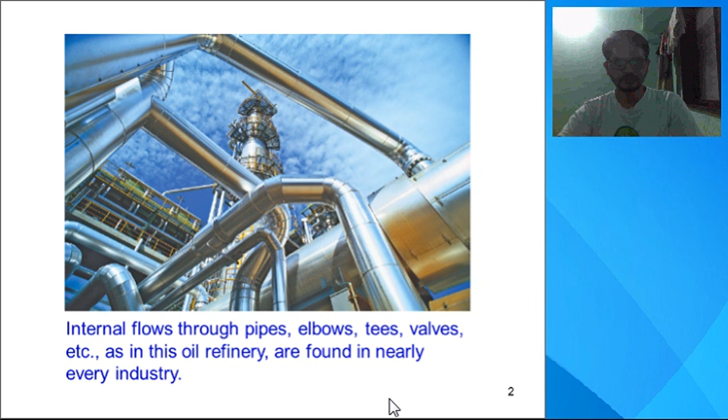So liquid or gas flow through pipes or ducts is commonly used in heating and cooling applications, and also for fluid distribution networks. The fluid in such applications is usually forced to flow by a fan or a pump through a flow section.

We pay particular attention to the friction, which is directly related to the pressure drop that might take place, and head loss during the flow through the pipes and the ducts.

The pressure drop is then used to determine the pumping power requirement - how much should be the power of a pump installed in a pipeline, or the power of maybe a fan, or it could be a blower.

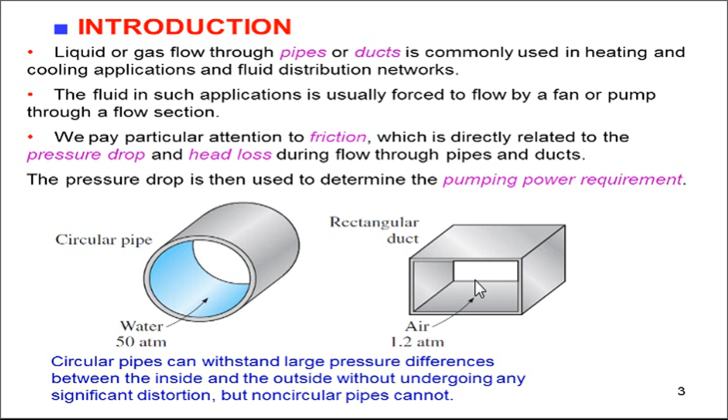Now, energy losses through the pipe take place when the flowing fluid experiences many resistances, which result in the loss of energy of the fluid. These energy losses can be classified into two types: major losses of energy and minor losses of energy.

Major losses are due to the friction, and it can be calculated using two formulae. One is Darcy-Weisbach equation and the second one is Chezy's formula.

Minor losses are the losses which occur due to presence of different pipe fittings - for example, sudden expansion, sudden contraction, provision of a bend or elbow or valves, and so on.

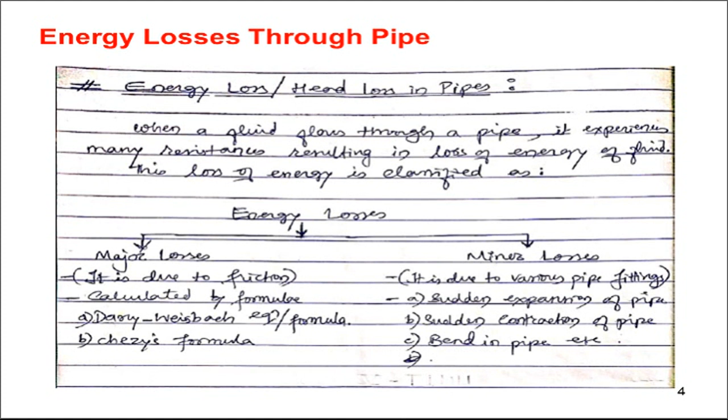So coming to the point of major energy losses, these are measured, these can be calculated using Darcy-Weisbach equation.

Consider a uniform horizontal pipe with a steady flow of a fluid, and consider a mass of fluid between two sections, section 1-1 and section 2-2. The flow of fluid is a steady flow, meaning the velocity is not changing with respect to time. Also, the cross-sectional area of the pipe is uniform, so the diameter of the pipe is uniform.

Let us consider two sections 1-1 and 2-2, and analyze the fluid present in these two sections. Let P1, P2 represent intensity of pressure at sections 1 and 2. Let v1, v2 represent the velocities at sections 1 and 2.

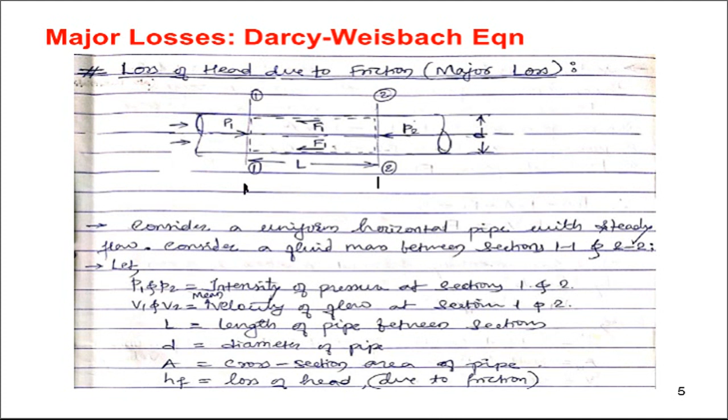Now let us apply Bernoulli's equation between sections 1 and 2. So we write: total energy head at section 1 is equal to total head at section 2 plus loss of head due to friction, if any, between 1 and 2.

So the different terms are: the pressure head P1 upon gamma plus kinetic head V1 square upon 2g plus datum head Z1 at section 1 is equal to pressure head P2 upon gamma plus V2 square by 2g kinetic head plus Z2 as datum head at section 2, plus the loss of head due to friction, that is HF.

But for a given horizontal pipe, Z1 is equal to Z2, so this can be cancelled, and velocity V1 is equal to V2, since the diameter of pipe is same, it is uniform, and it is a steady flow, so automatically it becomes a case of uniform flow. So V1 is equal to V2, and these two terms get cancelled.

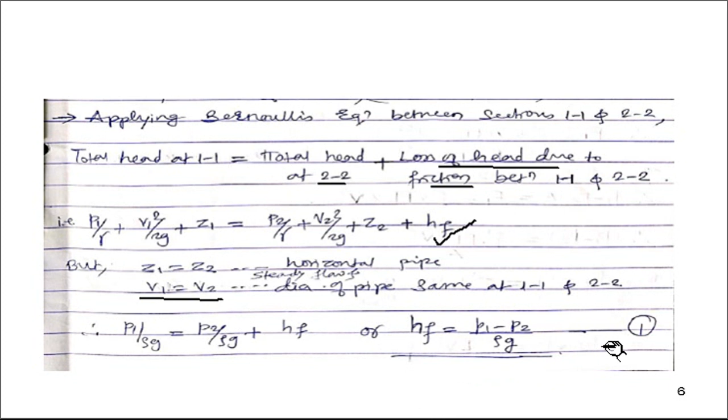So therefore we have P1 upon gamma, that is rho g, is equal to P2 by gamma rho g plus HF. Or you can write the frictional head loss HF equal to P1 minus P2 upon rho g. Let us call this equation number 1.

Now as the velocity of flow is constant at both sections 1 and 2, it means there is no acceleration of the fluid. There is no acceleration of the fluid, so acceleration is 0.

Thus the sum of forces in the flow direction acting on the fluid mass between the two sections is 0. This is as per Newton's second law of motion, that is summation of F is equal to mass into acceleration, and acceleration is 0, so automatically summation of F is equal to 0.

So all the forces acting on fluid mass are written as: there will be a pressure force at section 1, calculated as P1, intensity of pressure, into area. This is towards right in the direction of flow, so positive.

Then we have pressure force at section 2, written as P2 into corresponding area A, cross-sectional area. This will be against the flow direction, towards left, so negative sign.

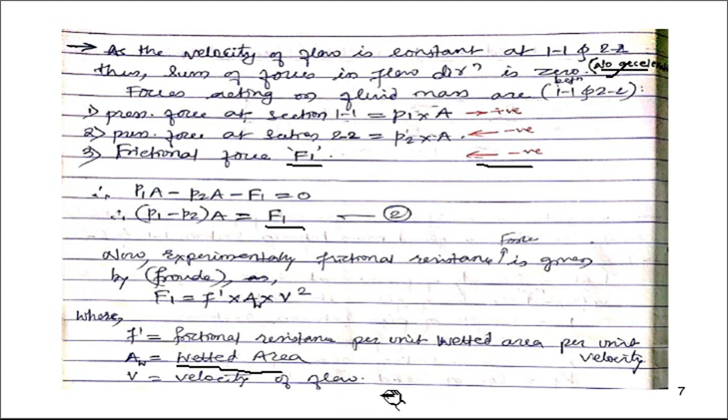Therefore, F1 can be written as F dash into the wetted area, which is nothing but perimeter into length. So perimeter is pi into d into length into V square. Thus from equation number 2, substituting this, we have P1 minus P2 into area is equal to F1, and that is equal to F dash into PL into V square. So we can simplify as P1 minus P2 is equal to this term on the right hand side.

Thus, substituting P1 minus P2 as HF into rho g from equation number 1 on the left hand side, this is equal to F dash into L into V square into perimeter pi d upon area substituted. Area is cross sectional area. Remember, this cross sectional area multiplies the pressure, so it goes down as a denominator. It is pi by 4 d square.

So thus HF into rho g is equal to F dash into LV square into 4 by d. Or we can write HF, the frictional head loss, is equal to F dash upon rho g into 4LV square upon d.

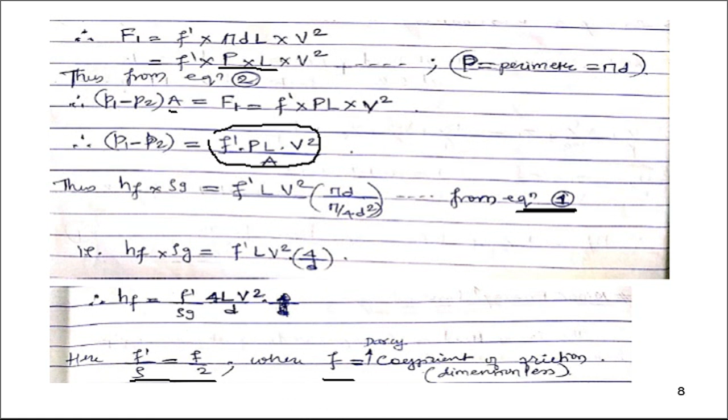So we get a formula: HF equal to 4 small f LV square upon 2GD. Or it can be written simply as capital F LV square upon 2GD. So these are the formulae for HF, that is frictional head loss, and this entire equation is called the Darcy-Weisbach equation

which gives you the value of frictional head loss, expressed in terms of meter. HF is expressed in terms of meter of fluid.

Here capital F is equal to 4 times small f, which is known as the friction factor. Capital F is known as the Darcy friction factor, and it is a dimensionless term, whereas small f is called the Darcy coefficient of friction.

So there should not be any confusion in remembering this formula of the Darcy-Weisbach equation. If you are writing HF equal to 4FLV square upon 2GD, then if there is a 4 here, it means the F term is the Darcy coefficient of friction. And if you are using the other formula, FLV square upon 2GD, then capital F means the Darcy friction factor, and there is a relation between these two: friction factor is equal to 4 times coefficient of friction.

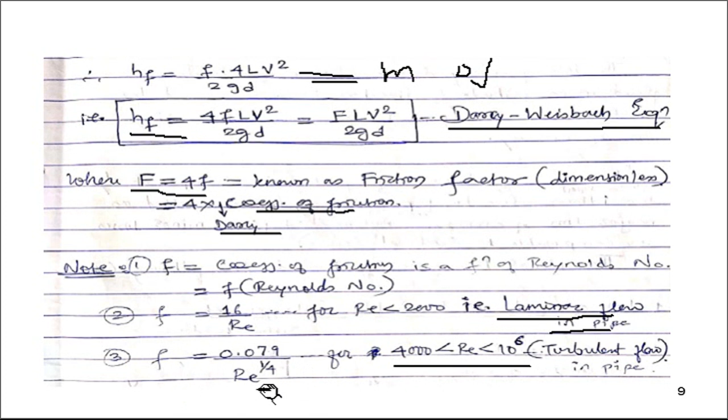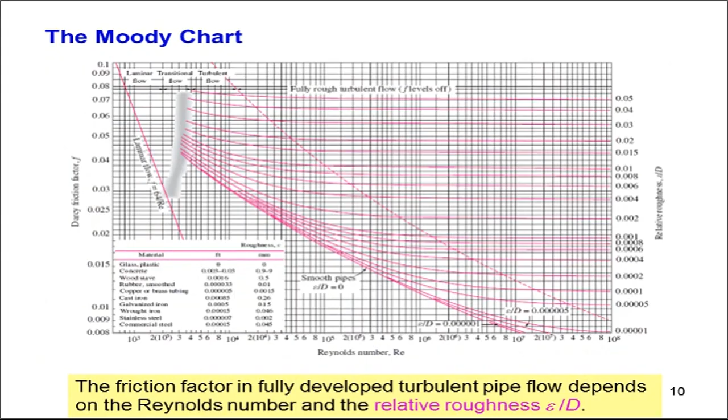These are independent of the Reynolds number. The flow in that region is called fully rough turbulent flow, or fully rough flow. Why? Because as the Reynolds number increases, the thickness of the viscous sublayer decreases and it becomes so thin that it is negligibly small compared to the surface roughness height.

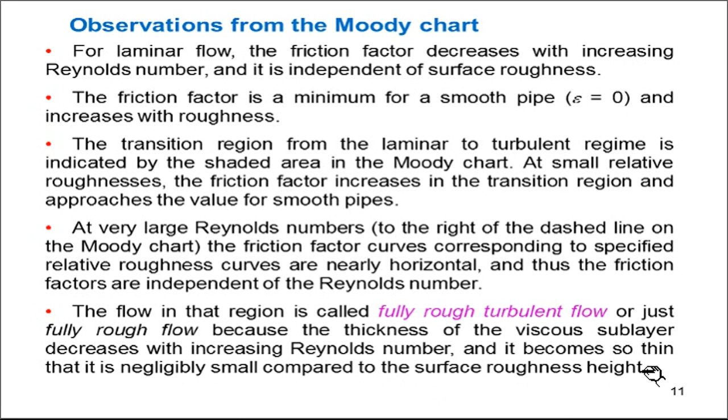Now coming to the discussion of minor energy losses. The loss of head or the loss of energy due to friction in a pipe, we are calling major loss, and the loss of energy of a fluid due to change of velocity of the fluid in magnitude and/or direction caused by disturbances like the pipe fittings...

...provided in a piping system is called minor loss of energy. So minor loss of energy is the loss in the energy of the fluid due to the change of velocity of the fluid. Now this velocity changes either in magnitude or in direction or both. This change in velocity takes place because of the provision of pipe fittings which are part of a piping system. So such a loss of energy is called minor energy loss.

The loss of energy because of friction is comparatively more in the case of long pipes than due to the pipe fittings, and hence these losses are known as major loss of energy. This is the case with very long pipes. So in very long pipes, the loss of energy because of friction is on the higher side. Magnitude wise it is on the higher side as compared to loss of energy because of pipe fittings in a long pipe. While for short pipes there could be a situation where minor losses could be comparable to the frictional losses.

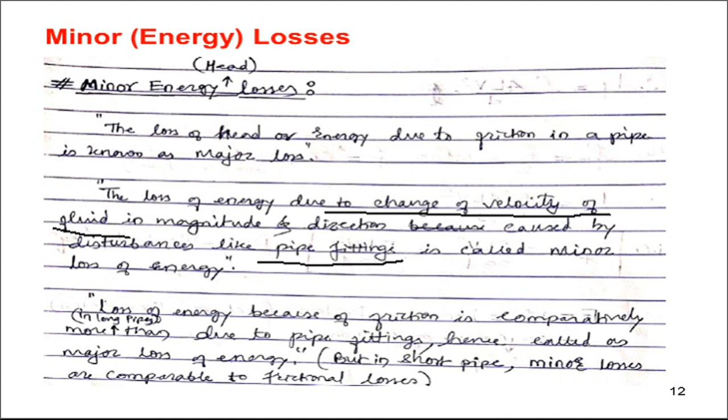There can be a situation where short pipes may have more number of pipe fittings, and that will result in higher magnitudes of minor energy losses as compared to frictional losses. The minor loss of energy includes the following cases. The first type is the loss of head due to sudden enlargement.

So here you can see there is a sudden enlargement in the diameter of the pipe from D1 to D2. Due to sudden change in diameter, the flow separates from the solid boundary. Here the flowing fluid is separating from the solid boundary, and this separation results in formation of turbulent eddies due to flow separation. The fluid is not able to keep up with the surface of the pipe. Eventually it fills up the pipe and occupies the entire diameter D2, but there is a zone where flow separation has taken place, resulting in formation of turbulent eddies. And we know these turbulent eddies are responsible for loss of head.

So this minor loss of head due to sudden enlargement or sudden expansion is given by HE equals V1 minus V2, bracket square, upon 2G, where V1 is the velocity in the smaller pipe and V2 is the velocity in the bigger pipe. So V1 is on the upstream side, V2 is the velocity on the downstream side of the disturbance.

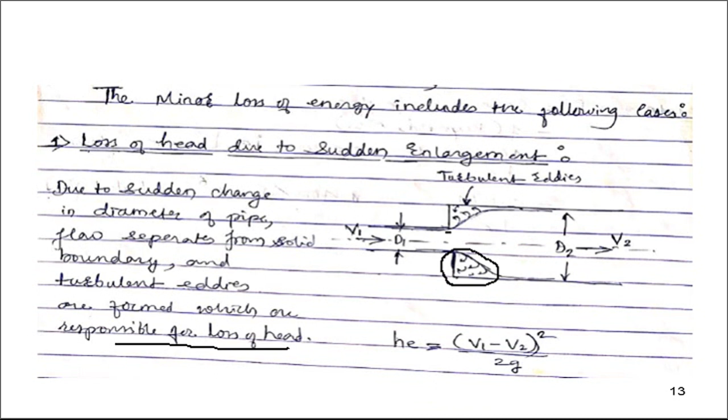Second one is the loss of head due to sudden contraction. This is the second type of minor energy loss. Here you can see there can be a situation where the diameter of the pipe suddenly contracts, so the velocity of the fluid will increase from V1 to V2. But you can see there is a formation of a vena contracta section, because there is a sharp edge, and that results in acceleration of the fluid, and it will slightly get separated from the pipe surface, and the fluid contracts. There is a formation of a vena contracta, and again the fluid slightly expands and fills up the pipe. So the loss of head due to contraction is actually the loss due to sudden enlargement which follows after the vena contracta. So after the vena contracta there is a sudden enlargement.

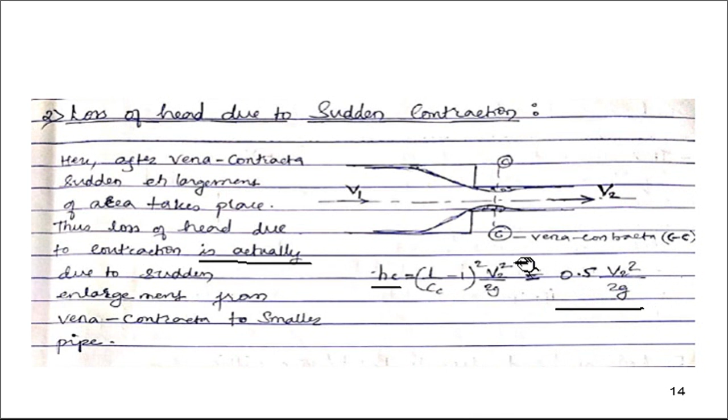So this head loss HC is given by 0.5 V2 square upon 2G, where V2 is the velocity on the downstream side. Third minor loss of head is because of entrance of the pipe.

So there can be a pipe which can be connected to a tank or a reservoir like this. This loss occurs when the liquid enters the pipe connected to a large tank. If the corners are sharp, then the loss of energy is similar to the loss due to sudden contraction. It depends on the form of entrance of the pipe. For a sharp edge entrance, the loss is more as compared to a rounded or bell mouth entrance of a pipe, and this is expressed by a formula HI equals 0.5 V square upon 2G, where V is the velocity in the pipe.

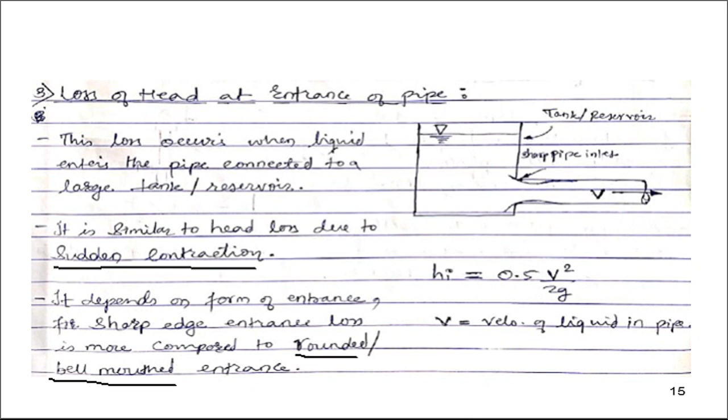Fourth type is loss of head at exit of pipe. The flowing fluid in a pipe has some velocity, say capital V, and it has some kinetic energy. So when the fluid exits out from the pipe, the outgoing water, which can be in the form of a free jet, has the kinetic energy in it, and which is ultimately wasted. So the kinetic head, velocity head in the outgoing water is V square upon 2G, and it is wasted. So this loss of head at exit of pipe is written as HO equals V square upon 2G.

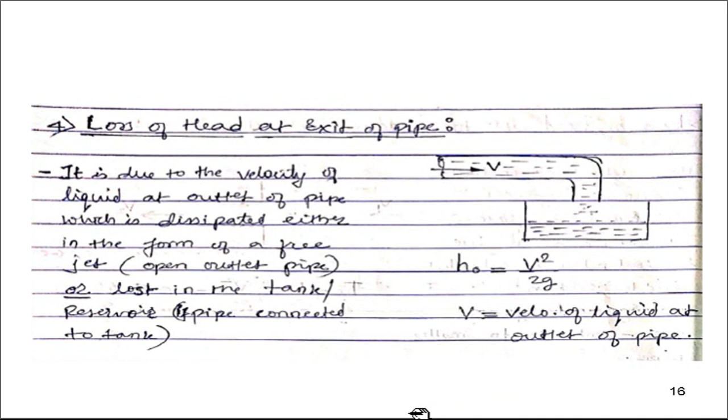Also, if the pipe is connected to a tank, then there is also a loss of the energy of the water inside the tank. The formula remains the same. Fifth type of minor energy loss is the loss of head due to bend or pipe fittings.

So there can be a pipe fitting like elbow over here. This is the elbow. There can be a bend. There can be a provision of a valve like this. So due to these different pipe fittings, the flow separates from the boundary and formation of eddies takes place, which results in energy loss. So this loss of head in general is given as small h equals capital K into V square by 2G, where K represents the coefficient of pipe fittings and V is the velocity of flow.

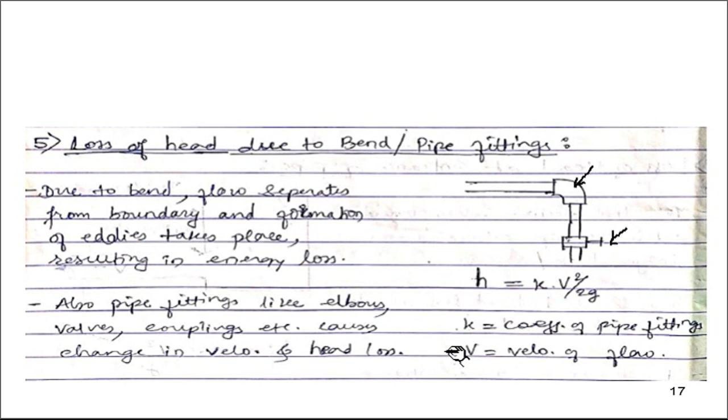Please make a note, we have not derived all these formulae for minor energy losses because these derivations are not expected as far as our syllabus is concerned. So you have to only remember the end formulae of all these minor energy losses. But of course we have a derivation for major energy loss, and that is given by the Darcy-Weisbach equation. So derivation of the Darcy-Weisbach equation is important. Let us see one numerical on major losses.

Consider an oil of specific gravity 0.7 flowing through a pipe of diameter 300 mm at the rate of 500 liters per second.

Find the head lost due to friction and the power required to maintain the flow of oil for a length of 1000 meters. Take kinematic viscosity as 0.29 Stokes.

There is a pipe of 1000 meter length carrying oil of specific gravity 0.7. Pipe diameter is 300 mm, so 0.3 meter. Discharge rate through the pipe is 500 lps, so 0.5 meter cube per second. Length is 1000 meter. Kinematic viscosity is 0.29 Stokes, meaning cm square per second.

So it is multiplied by 10 raised to minus 4, which converts it to meter square per second. You have to find the head lost due to friction, that is major energy loss, HF. The second term is the power required to maintain the flow through the pipe.

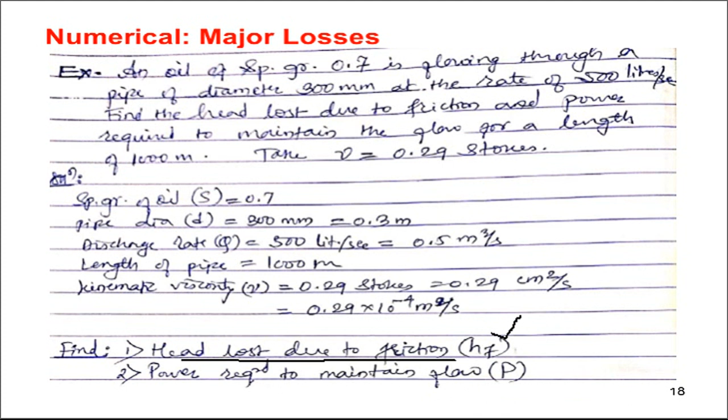The major energy loss, head loss due to friction HF, is given by the Darcy-Weisbach equation. So HF equals 4 times small f, L, V square upon 2GD. If there is a 4 as a subscript, then small f means Darcy coefficient of friction.

Velocity in the pipe can be calculated as discharge per unit area of the pipe. So you plug in these values and you get a velocity of 7.07 meter per second. Let us calculate Reynolds number.

Reynolds number is given by the formula RE equal to rho VD upon mu, or VD upon nu, where nu means kinematic viscosity. So plug in the values: velocity multiplied by diameter divided by kinematic viscosity. You should get a Reynolds number equal to 7.316 into 10 raised to 4.

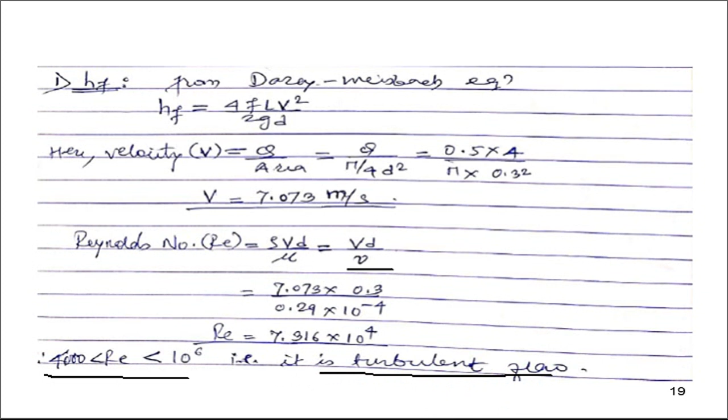You can clearly see the Reynolds number is more than 4000 and less than 10 lakhs, so it is a case of turbulent flow in the pipe. For turbulent flow in the pipe, the Darcy coefficient of friction is given by the formula: small f equal to 0.079 divided by Reynolds number raised to 1 by 4.

Put this value of Reynolds number and we get a value of small f, coefficient of friction, as 0.0048.

Thus head loss due to friction, HF, can be calculated by plugging in all these values. You get a value of 163.18 meter of oil. So this much meter of oil, this much energy in terms of head of oil, is lost in overcoming the friction offered by the pipe surface to the flow of the oil.

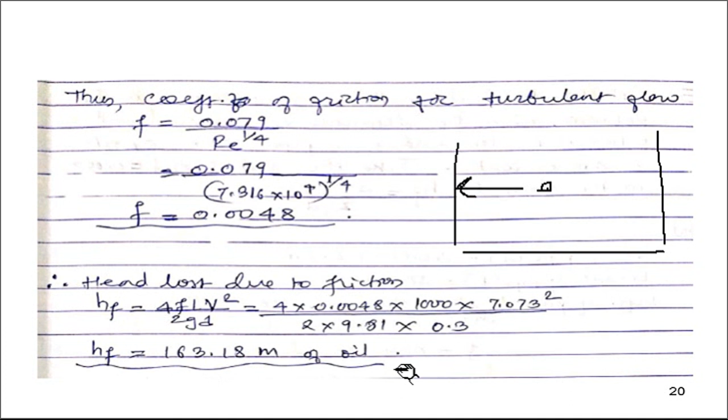The second part is the power required to maintain the flow of oil in the given pipe which has a length of 1000 meter. Power required is given by a formula: capital P, the power, equals gamma Q HF.

Gamma means specific weight of the fluid, Newton per meter cube. Q means discharge rate, meter cube per second. So that will be Newton per second into HF. HF will be in meter. So finally you get a unit of Newton meter, Newton meter per second rather.

Rho of oil can be calculated as specific gravity of oil multiplied by rho of water, 700 kg per meter cube. So this is 700 kg per meter cube into G 9.81 into Q 0.5 meter cube per second into HF, 163.18 meter, divided by 1000.

1000 converts it directly into kilowatt, otherwise you will get the answer in watt. So power required is equal to 560.28 kilowatt.